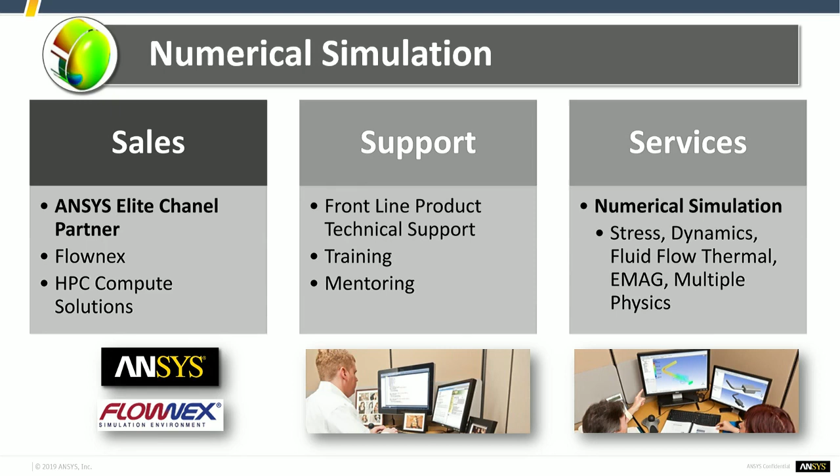Again, we kind of operate in the Southwest U.S., ranging from California to Texas. An award-winning technical support provider, very strong technically, customer-focused, and really a lot of long-term relationships with large customers and small customers alike, providing a strong relationship and strong return on investment for the software.

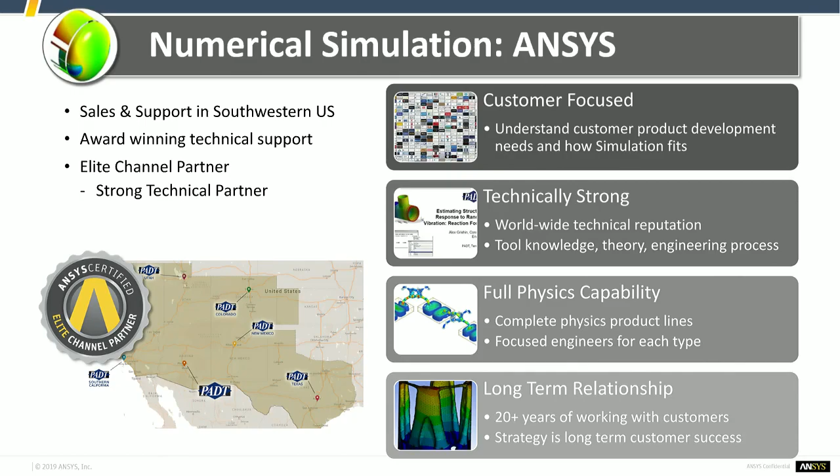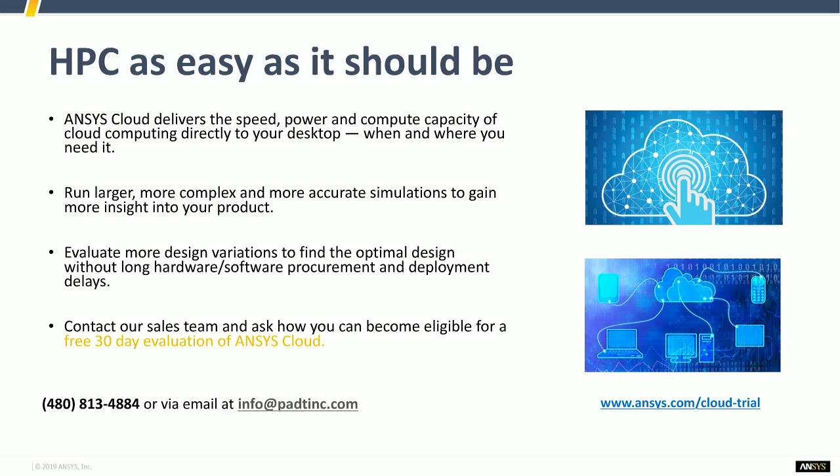So again, it's as easy as HPC should be. You don't have to worry about maintaining any type of interconnects, any type of installation control, anything like that. So if you're curious at trying that, contact our sales staff. There's, I believe, still free 30-day evaluation trials. Contact us at info@padt.com or our phone number. Obviously, if you're outside of our sales territory, you can also contact your support provider for additional information.

So we'll talk about topology optimization right off the bat, both level set and density based. And so for both of those workflows, there is a new design validation process.

Previously, you would have to generate your optimized shape based off of your inputs, regardless of if you're running level set or density based. You would then export or link that result set of your topology optimization to a downstream geometry session in SpaceClaim. You then go through and run whatever type of reverse engineering or cleanup, shrink wrap, smoothing operation you want, and then you link that into however many simulations that you used prior to generate that optimized shape to actually look at stresses and strains, deflections on that optimized part.

So now it's a lot more automated. You can just right mouse click, say to transfer to design validation system on your topology optimization result. It automatically builds all of your input physics. So if you had two structurals, a modal, something else that were feeding that top opt run, it automatically builds all of that for you. And the big thing here is it automatically rescopes all of your boundary conditions for you.

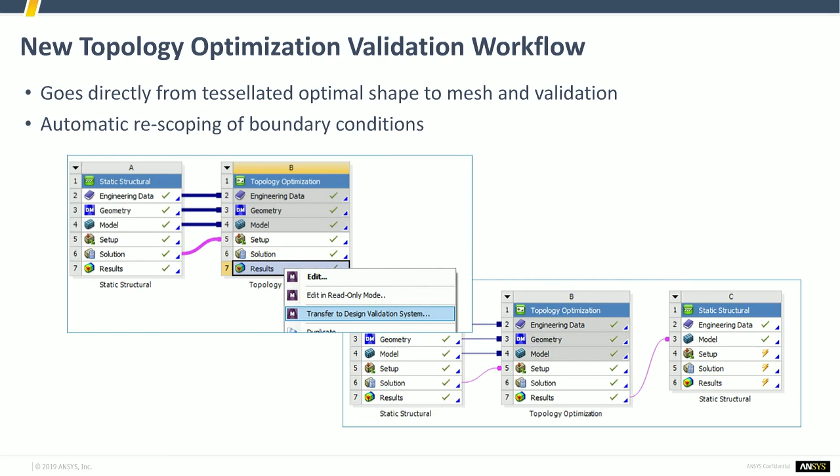The thing to note here is that in order for this automated process to work, you have to do one thing up front. It's the exact same process regardless of if you're running density or level set. You define your analysis, you run your topology optimization. After it's done, on your topological element density plot in the bottom right-hand corner, you right mouse click on that and insert a smoothing object, and specify that you want to export the model. It's very important. If you don't do that up front, then the automated rescoping and recreation of everything doesn't quite work. So do this up front.

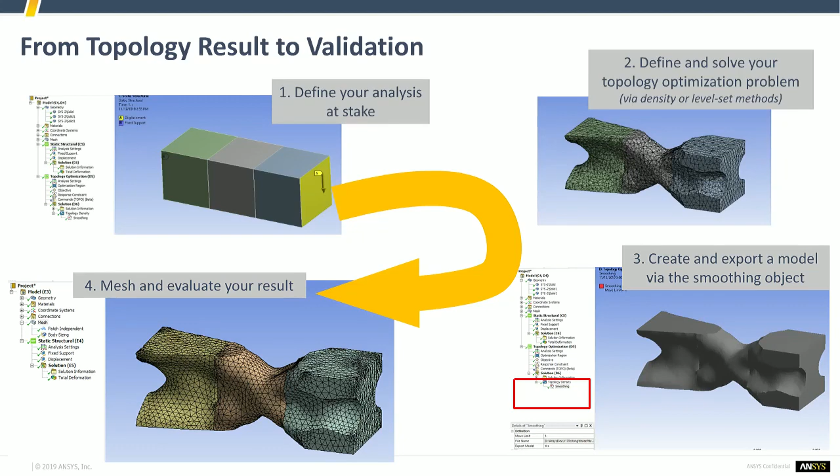You don't have to insert this before you run your topology optimization. This is just before you do that design validation. Right mouse click, insert it, set the export to yes, and then you can go ahead and run your validation study.

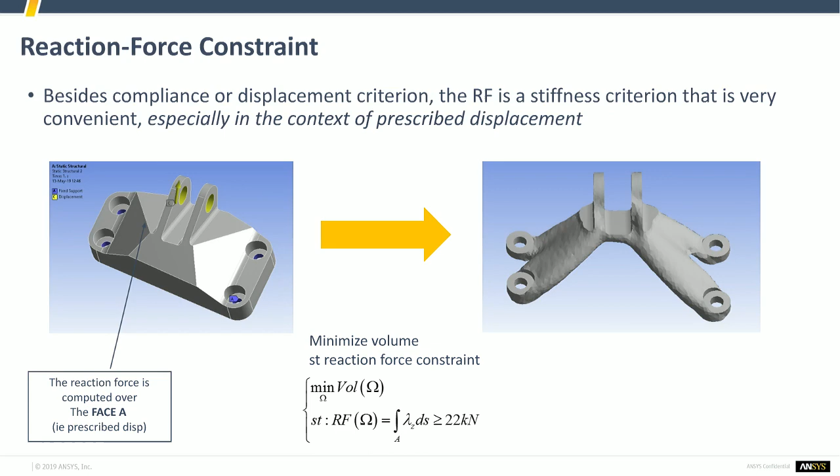So some additional constraints that were added is the reaction force constraint. You should be able to specify a range of values, so it's just an additional constraint for both topology optimization engines, for both level set and density based. It offers some pretty interesting effects on being able to essentially tune the reaction force based off of what's important versus not important in your model.

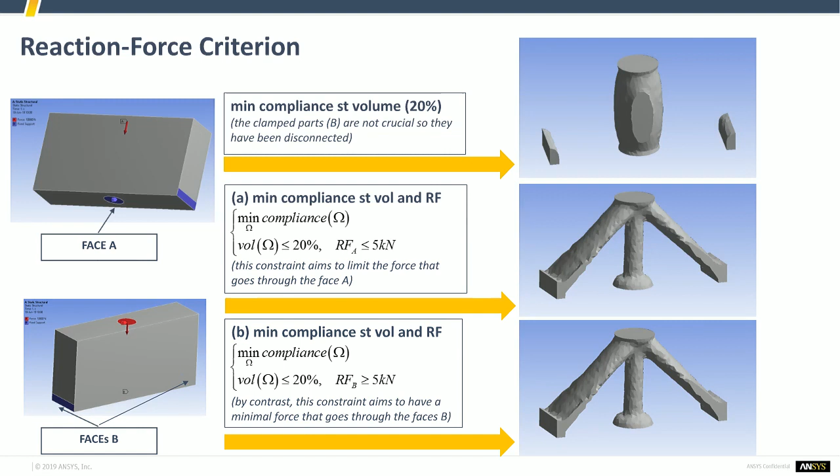You can see that without a reaction force constraint on the two clamped faces on the left and right side, we essentially just disconnect those two faces from where the load is occurring to where it's being reacted out. So if you need to fine tune or limit the force going through certain areas, this is a nice control or criteria that you can insert into your topology optimization simulation.

User-defined criterias were beta at the last rev, and these are essentially just ways where you can tag nodes, tag vertices, tag finite element objects, and essentially create your own constraints or objectives. So if you want to make sure that as you're removing mass from one section, the deflection at a node at another location meets a certain criteria or drives an objective, this allows you to do that.

You can then create composite criteria, which essentially allow you to define a worksheet where you can add, subtract, do whatever you want between relative primary criteria. So if you're trying to make sure that the total distance between two nodes is a certain value, you can work your way through creating a worksheet that drives that type of equation, that type of relationship. Then in your topology optimization, you can specify that your criteria are these primary or composite criteria downstream.

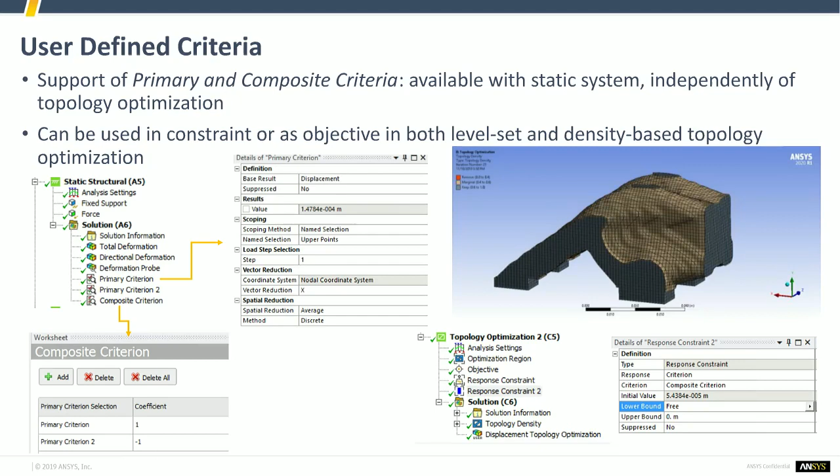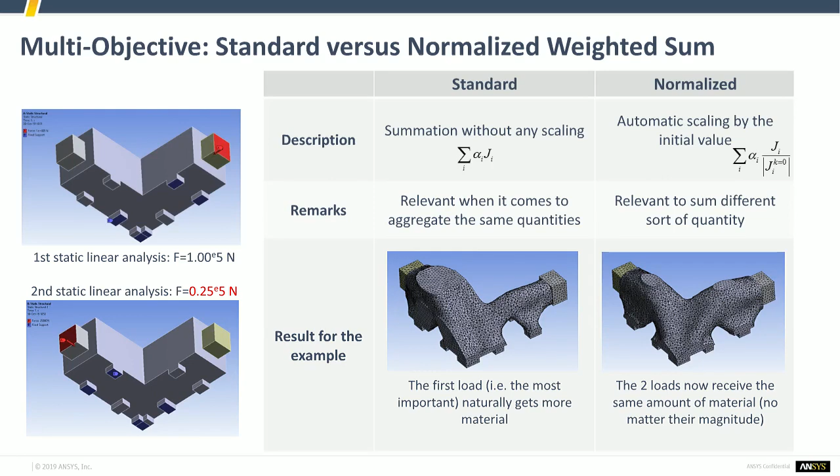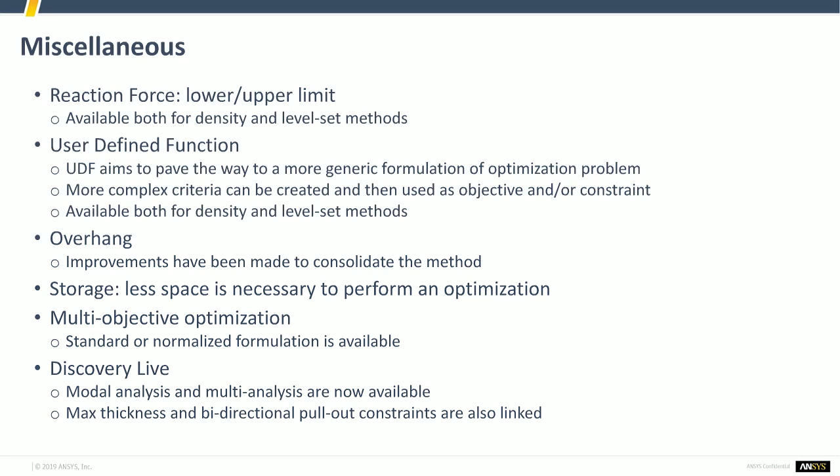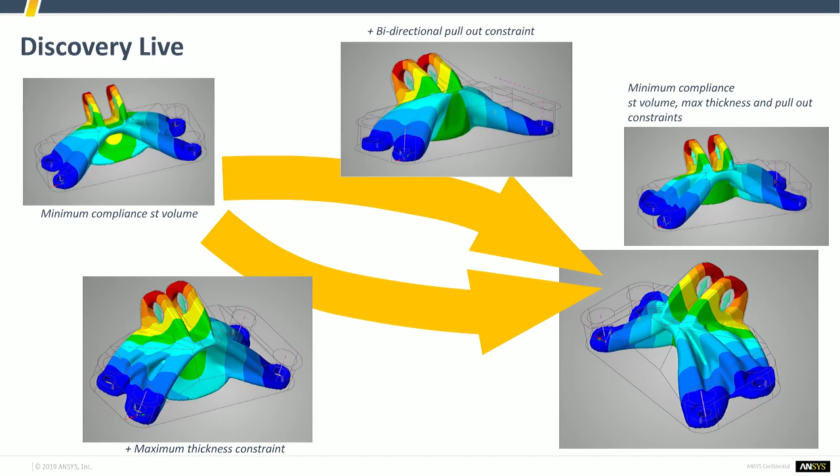There's been some additions or improvements on the Discovery Live side of the house. Discovery Live has supported topology optimization for a bit, but it was limited in what it could do. Now you have the ability to specify multiple analysis environments feeding into that optimization run. There's some additional manufacturing constraints specifically on the max thickness and also a pull direction to help prevent some internal cavities essentially forming or hollowing out in a particular direction. So if you're looking at creating something specifically for a molding or casting application, it's a good use.

As far as changes specifically to the density-based solver, we'll get into a few of these. This is actually new to me.

I didn't realize that you could do bolt pretension in a topology optimization run, so a little ignorance on my part. But the previous limitation was that it had to be in the load position. So bolt pretensions operate in a load, lock, adjustment, and open case. So previously, if you wanted to include a bolt pretension effect as part of the driving load that you're optimizing for, it had to be left in the load position.

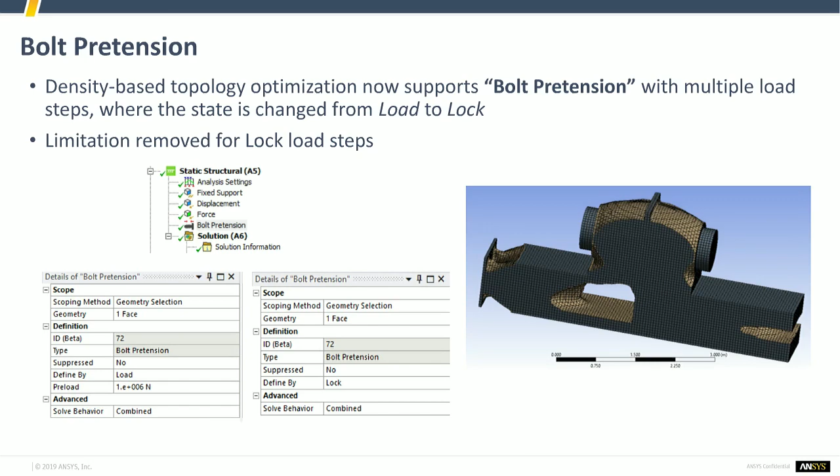So that's been removed. You can now specify a lock condition for your topology optimization run with the density-based solver. There's been a less restrictive mesh rejection algorithm for specifying an extrusion manufacturing constraint, so basically not being as strict as we previously were, which may have erroneously rejected some output mesh shapes.

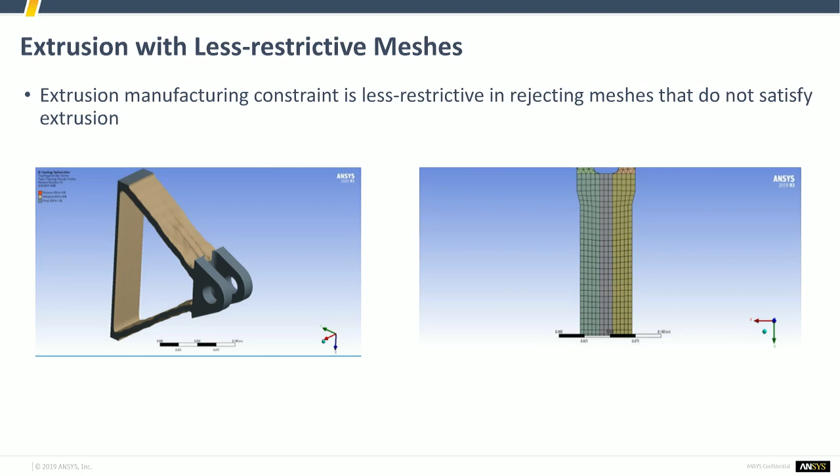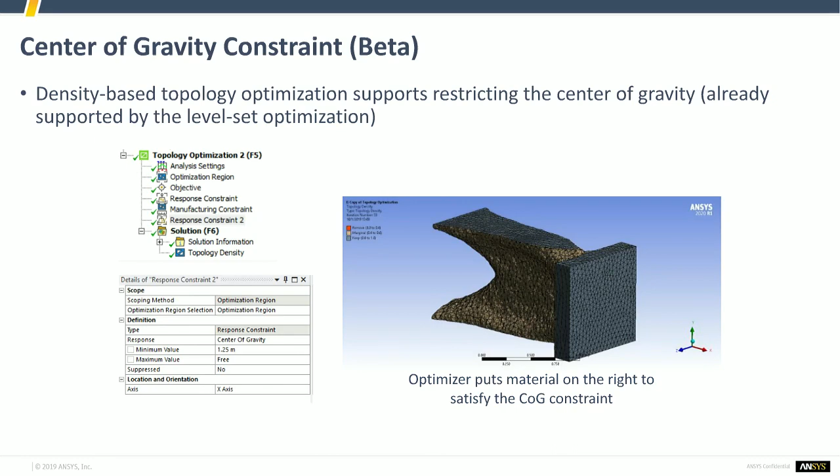So previously at 2019 R3, there were some additional constraints that were available specifically on mass and inertia information, but it was only available on the level set. So it's been released to the density-based solver in beta at 2020 R1. And so it allows you to specify what the center of gravity is and where it's located on a particular axis. So pretty much rolling over functionality from level set to the density based. So again, that's going to be both the CG and the moment of inertia.

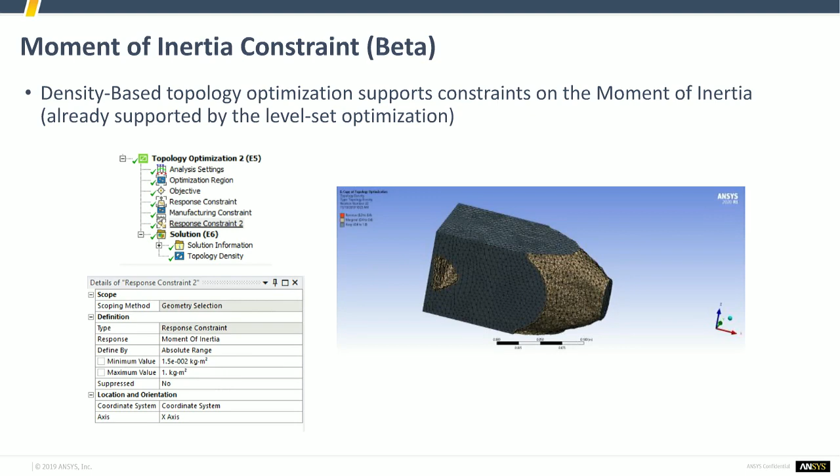So it's very useful if you're trying to replace a part but not change the overall dynamic behavior. So making sure that natural frequency wise and also from an excitation or any type of dynamic response, if you're trying to essentially do a one-to-one replacement on a CG and moments of inertia for a launch vehicle or anything like that, you have the ability to insert these criteria.

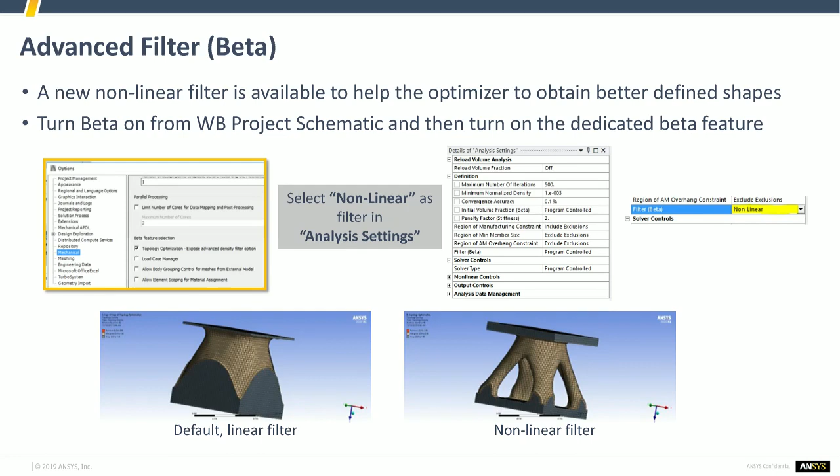Constraints. There's a new advanced filter that's available. It's a beta feature, so on the project schematic, you have to go and turn on beta features and specifically choose this. And it's essentially just, rather than using a linear filter to decide whether or not elements are on or off from a density application, we're using a nonlinear filter to create some more elegant or better defined shapes. So you can play around with it, see if that gives you a more robust or interesting design.

So new at 2020 R1, this isn't topology optimization, this is shape optimization. So topology optimization, you can think of, I have this box, I don't know what it needs to look like in order to transmit a particular load to a particular reaction or a particular constraint. So shape optimization is where I'm going to be distorting the mesh based off of whatever criteria, whatever objectives that I define.

So this is beta, and typically we don't go over a whole lot of beta options in release presentations, but this is a pretty cool new tool. So making sure that people are aware of it. There wasn't shape optimization for a while in ANSYS, and so making sure that people are aware of it, people can start playing with it and see if it works for them.

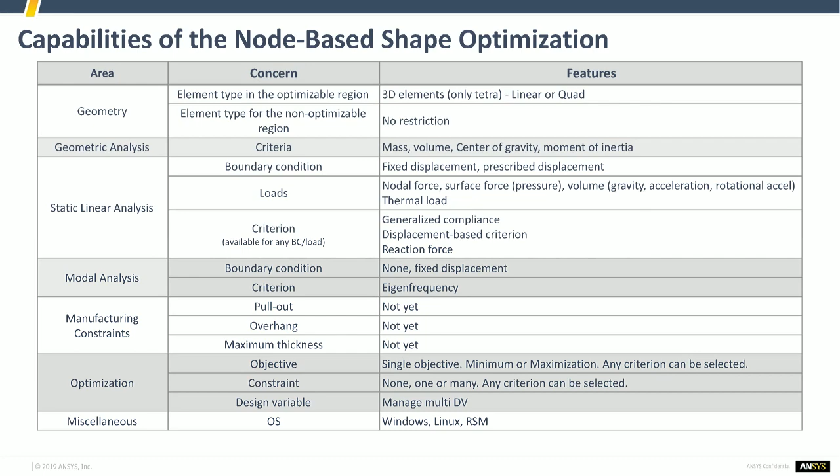So as far as the capabilities, it's a new feature, it's a beta feature, and so as far as the different constraints, the different loading environments, the different objectives that it supports, it's going to be limited, but for the most part, for a static analysis and a modal analysis, it offers some interesting utilities.

So here's an example of a bull. Rather than starting out with a domain and then whittling out elements based off of a pseudo density or a level set way of handling a closed loop, we are instead distorting the mesh based off of the criteria that we define. And so it is distorting the mesh, and some limitations here is it only works on tet meshes right now. But the nice thing here is you get a smooth shape out of the solution, and you can also view stresses, strains, deflections, all those post-processing results directly on the distorted mesh.

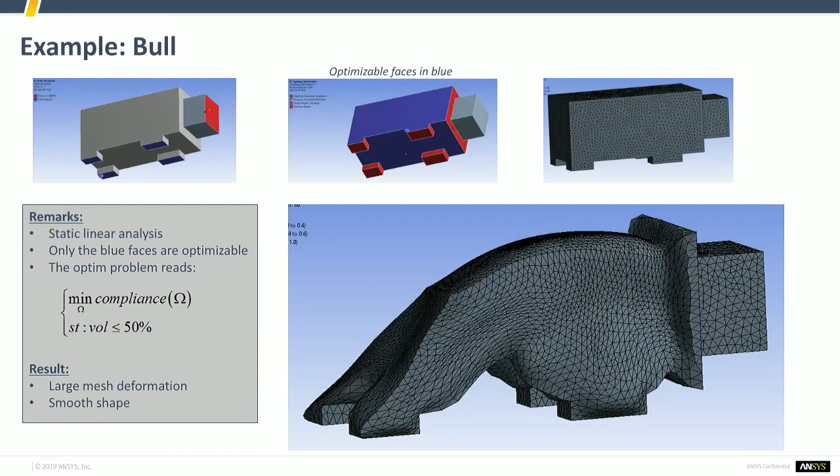And so on the topology optimization side, we're essentially whittling away elements, and then there's a validation check in order to actually investigate what those stresses and strains are. Here you can actually view those results on the actual mesh.

So comparing and contrasting the two methods, one of the common questions I get with topology optimization is, what if the domain changes, or let's say I have a larger bounding box that defines what my structure can be. With topology optimization, you're essentially limited to whatever bodies you've scoped it to, because that's where we can remove material. As far as the node-based optimization, we're essentially distorting the mesh in order to meet whatever requirements that we specified.

So again, this is a beta option. You can turn it on, play around with it, and it's a pretty cool utility depending on your application.

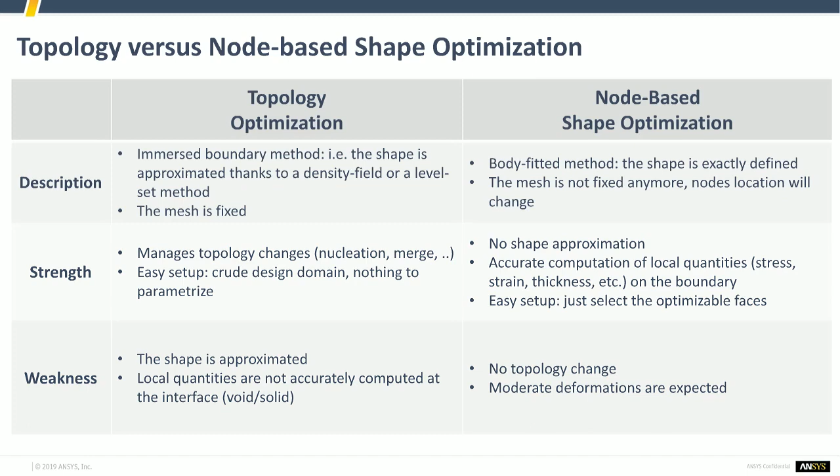All right, so that's all on the topology optimization side of things. We'll talk about additive manufacturing. So as far as Additive Prep, for those that can't quite keep all the different naming conventions that ANSYS has for all the additive tools, Additive Prep is a utility that sits within SpaceClaim.

Previously it was just used to identify what orientation I should use in order to help control against distortion, build time, and the amount of support I would need. It's since grown with some recent additions of other tools to be able to build an actual build file for a machine. And so each release we get a few more utilities as far as controlling machine-specific parameters.

And so specifically here, you can add some tree supports. Those are a new support structure. At 2020 R1, the ability to write build files for SLM and also generate CLI files for EOS machines. You can modify power, speed, and focus parameters for different vector scanning types. You can modify the scan order, so depending on if you want to do hatch, then border, or whatever sequencing

you want to do. There's built-in cost estimators, so that's an additional output. You can see how expensive something can be based off of an orientation, and make decisions on your overall build process.

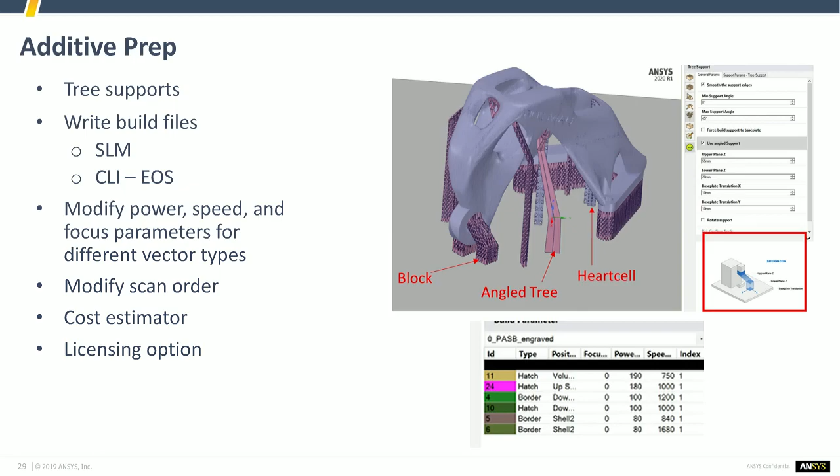So next on the ANSYS Additive side of things, specifically Additive Print and Science. This is formerly known as 3DSIM. It's been in the ANSYS orbit for quite a while, since at least version 19, if my memory's correct. And so this is essentially machine specific, so it's a nice utility. This is not running in the ANSYS Mechanical interface.

You essentially import an STL file, specify some materials, and then there's essentially 3 levels of simulation fidelity that you can run through in order to capture how your part builds, where stresses and potential problems can occur, look for any type of blade recoater impacts, anything like that.

So as far as what's new in 2020 R1, the ability, at least in beta, to read EOS build files. There's a new material, the aluminum silicon 10 magnesium, for all the simulation types, so microstructure, basic thermal history and stuff like that. We can control the laser beam diameter, and there's some cleanup on the log file to help assist with any type of errors.

The J2 plasticity has been removed from beta state and been improved, or certified. I think that's the word I'm looking for there. The build size was previously limited to, I believe, 500 to 600 millimeters in each direction. That's been increased to 1 meter cubed. Disabled the support optimization that was originally a standard functionality to optimize the support structure based off of physics, so you don't have to run that each time.

So on the Workbench Additive side of things, Workbench Additive is not Additive Print or Additive Science. This is running ANSYS Mechanical. Workbench Additive is essentially a linked thermal analysis to a static structural analysis. It is wizard driven to walk you through the process to specify some machine parameters, some boundary conditions, and other stuff like that.

And so new in Workbench Additive is the inherent strain method. That's essentially a port of one of the solver types within Additive Print. The inherent strain doesn't actually solve a thermal environment. Instead, we use the melt temperature as a guide to, on a layer by layer basis, turn on elements at a particular pre-strain, and then we capture how the model stresses or distorts as we build up layer by layer.

But this allows you to run some calibration prints on your machine in-house and then essentially account for those machine-specific behaviors in your model. So that way you can print a few different shapes, take some measurements, figure out what the actual scaling factors are versus an assumed idealized numerical simulation, apply those factors, and now you can fine-tune your simulation for a specific machine.

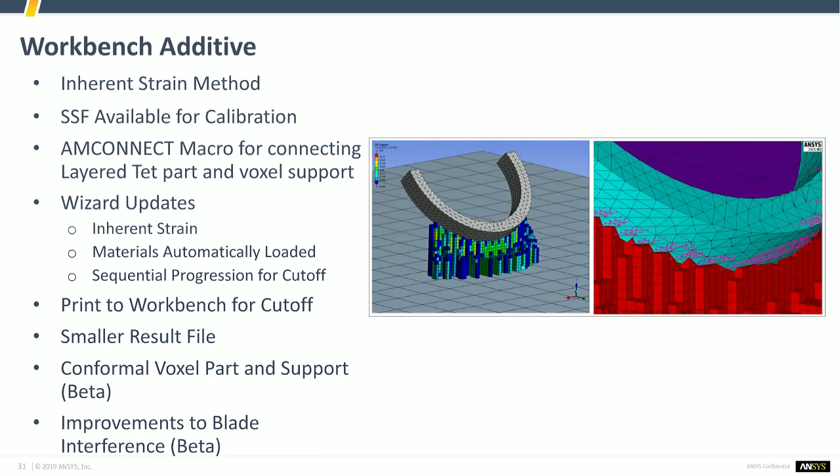All right, perfect. So talking about Workbench Additive, I kind of talked about this already, the inherent strain method. The default way that Workbench Additive operates is we're solving a transient thermal, solving for how the temperature gets distributed over time through the build process, and then we map that over to a static structural. Inherent strain instead just runs through the static structural with the melt temperature based applied strain.

So these can be isotropic or orthotropic, depending on if you want to account for the print scan orientation. And really it's, I call it almost a straight port of the functionality. It's not the exact same solver, but the same functionality that was in Additive Print is now in Workbench.

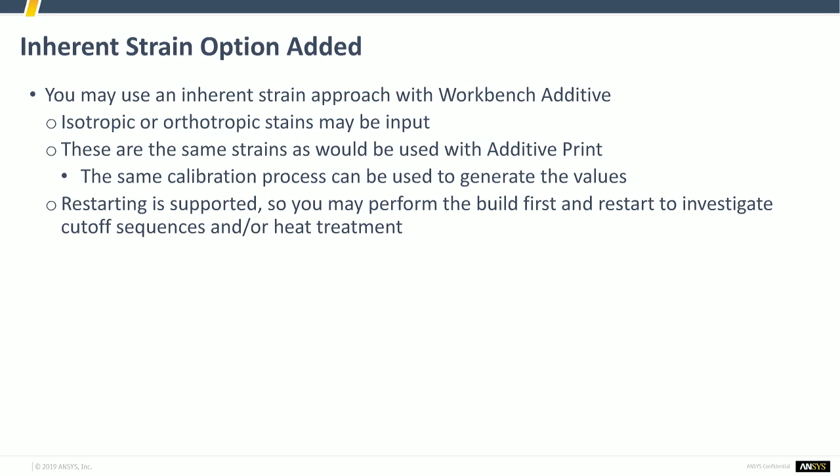So STLs that are generated from Additive Print. So remember, Additive Prep. Even I confuse the words apparently. So STL supports generated from Additive Prep can be represented as Cartesian meshes. All you'd have to do is import an STL support within Mechanical. It then creates a voxelized mesh based off of how much material is in each voxel, and it will calculate the appropriate knockdown factors.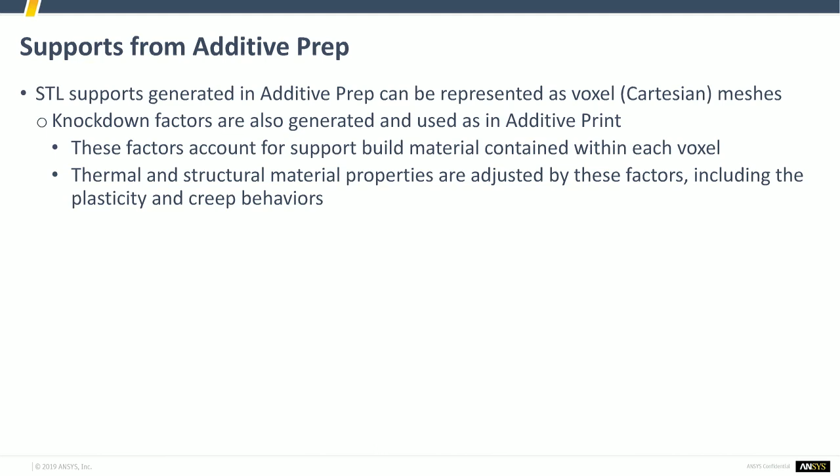So these voxelized supports, when we're tying them to non-uniform shapes, and if we're using a layered TET, there's a command snippet that you have to use in order to properly connect these dissimilar meshes. By default, they're not shared nodes. If you're an APDL user, to me it's kind of like a CEINTF command in order to tie together the degrees of freedom between dissimilar parts.

So you have to use the AM Connect and then use the part ID for your actual printed part. That's your material ID. And then support ID is the material ID of your voxelized supports, and it automatically generates the constraint equations to tie those together. You'd have to insert this on both the thermal environment and the static structural environment in order to properly tie together those thermal and structural degrees of freedom.

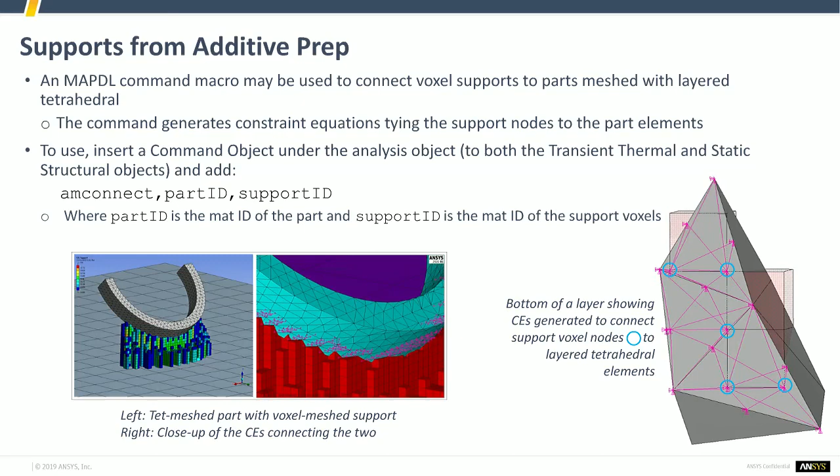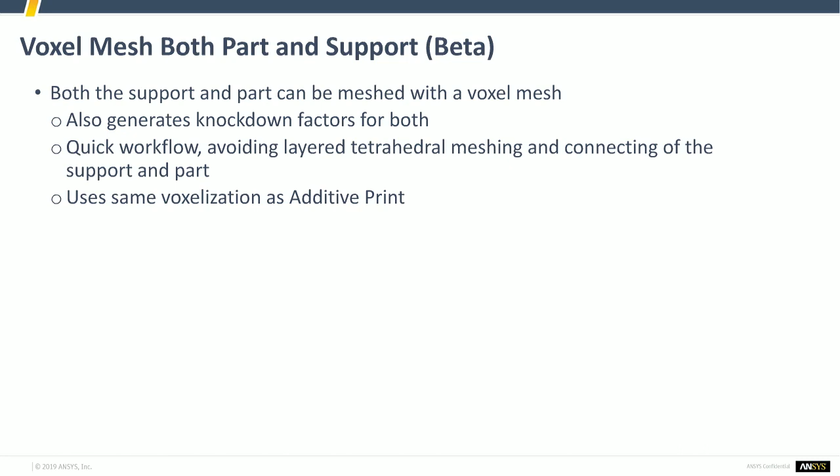So there's also a beta support in order to have the part and support meshed with a voxel and handle that shared node interface. Rather than using a layered TET, if you want to use a voxelizer, the Cartesian mesher, to mesh your part, this is the way to do it. It's a beta feature.

All right, so I had briefly mentioned Additive Print. That is outside of Mechanical. It's a web-based interface. You import an STL file, specify some machine settings and hit solve, and then post-process using, I forget the name of the tool off the top of my head. We can now take that as-printed, predicted shape or distortion of our part from Additive Print, and then continue our simulation within our static structural simulation.

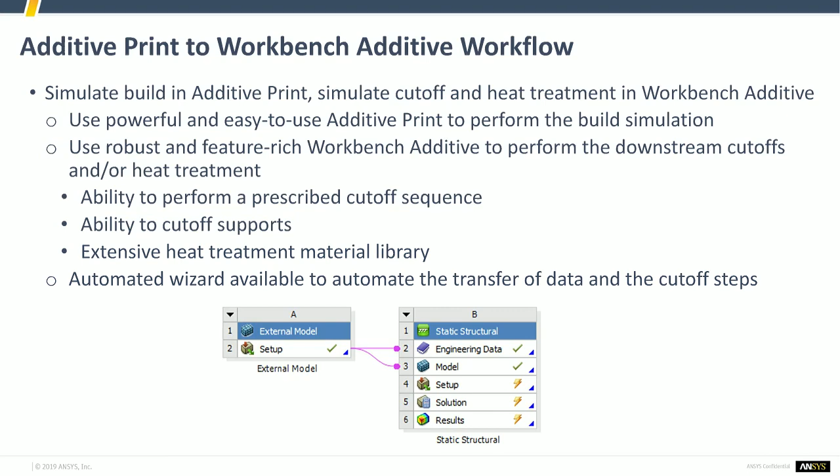And so this gives us some elegant heat treatment cycles. If you're trying to account for any type of heat treatment to your printed part, there are some very simplified ways where you essentially just zero out the thermal strains and see what that does to your part. Or if you know what type of creep material model you want to use in order to capture any type of relaxation, you would have to go into Mechanical. So this workflow allows you to go from Additive Print to Mechanical and add some additional material functionality, and also do a progressive cutoff. So hopefully the animation is going to work.

Oh, so again, the wizard has been updated to allow us to specify a cut direction, so we can see, as we remove our part from our build plate, what that does to the overall finalized shape and pre-stress of our part. So yeah, pretty cool.

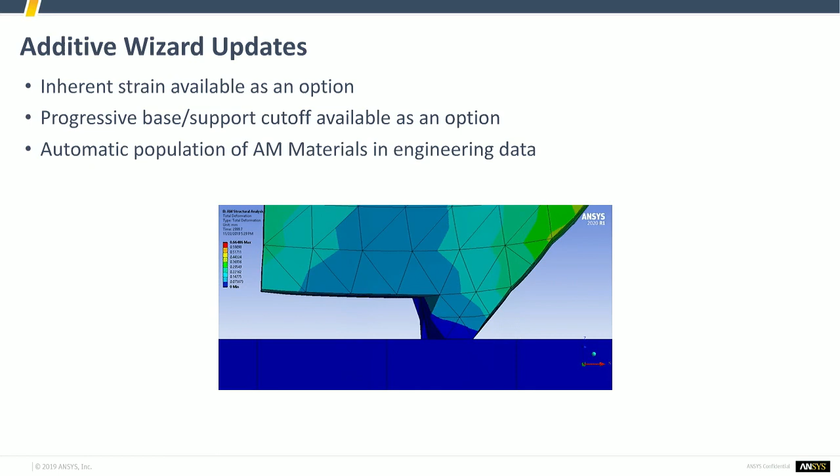So as far as additional enhancements and corrections, file size always seems to be an issue. People run bigger models, so there's a lot more resources involved. So the result file size has been optimized, so only output quantities for additive. And so, always a good thing using less disk space.

So for STL supports, scoped to an STL file, that file is now maintained in the Workbench project. Restarts are supported for user steps and the inherent strain method. There's scaling factors in the thermomechanical build simulation in order to reduce or increase the obtained distortion. So if you're trying to calibrate or optimize or back out and predict a distorted shape, you can play around with the strain scaling factors to see essentially how you need to distort your input STL.

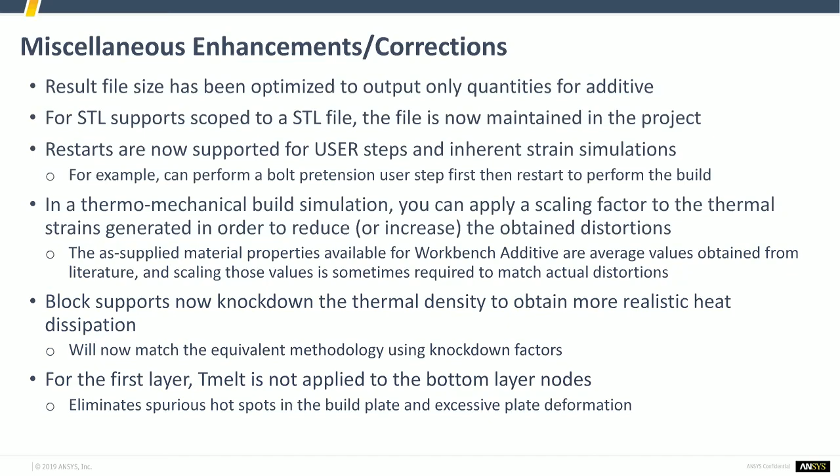We can use block supports and automatically calculate the knockdown factors for thermal density for more realistic heat dissipations. And on the first layer of the build, on the thermal side of things, the T-melt isn't applied. So there have been prior cases where there were super high distortions on that first build layer on the build plate due to excessive temperature loading. And so that's been removed. So it eliminates some spurious hot spots on the build plate and excessive plate deformation.